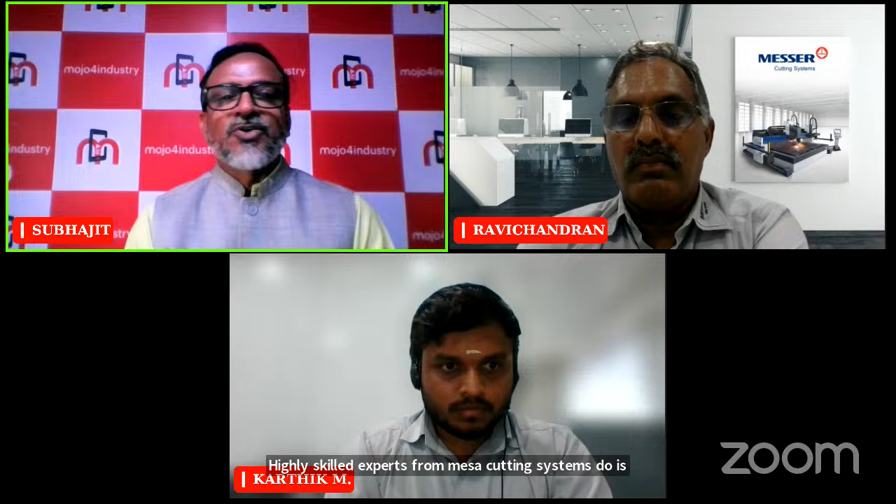Laser cutting, powered by smart manufacturing techniques. We will cover how laser cutting integrates with smart technologies to increase efficiency, precision, and flexibility. Highly skilled experts from Messer Cutting Systems India, Mr. Duraiswamy Ravichandran, DGM Product Management, and Mr. Karthik M, Manager Product Management, will share their insights into how integrating laser cutting with smart manufacturing techniques enhances precision, boosts productivity, and ensures high quality outputs.

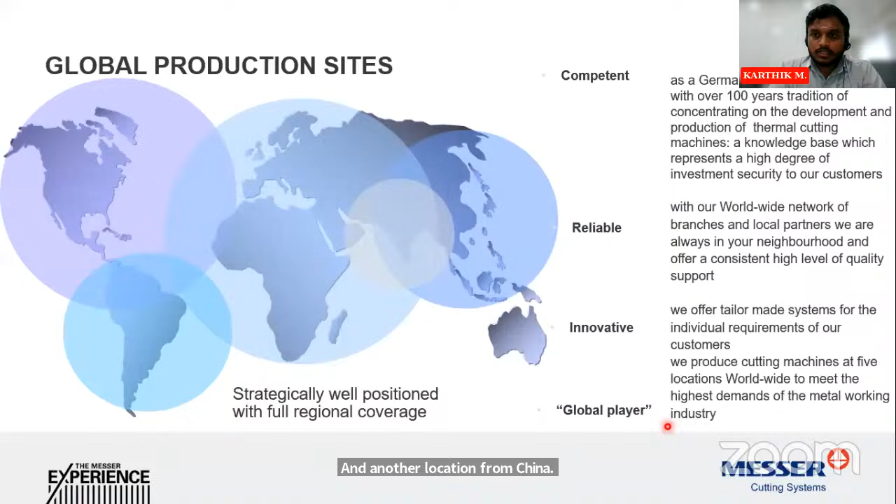We're a global player in every particular cutting industry. These are globally spread, with a plant in North America in Wisconsin, the second in Brazil, Europe from Germany, and India, with the territories of India including parts of Middle East taken care by the Indian territory, and another location from China. For all the eastern parts of the globe, it is taken care from China. Those are our global presence.

To start with, everybody knows that we are into thermal cutting equipments, and basically the thermal cutting process is split into 3 segments: oxy-fuel, plasma, and laser. The oxy-fuel is the very old and traditional method of cutting, where the thickness or capacity of cutting is much higher compared with plasma and laser.

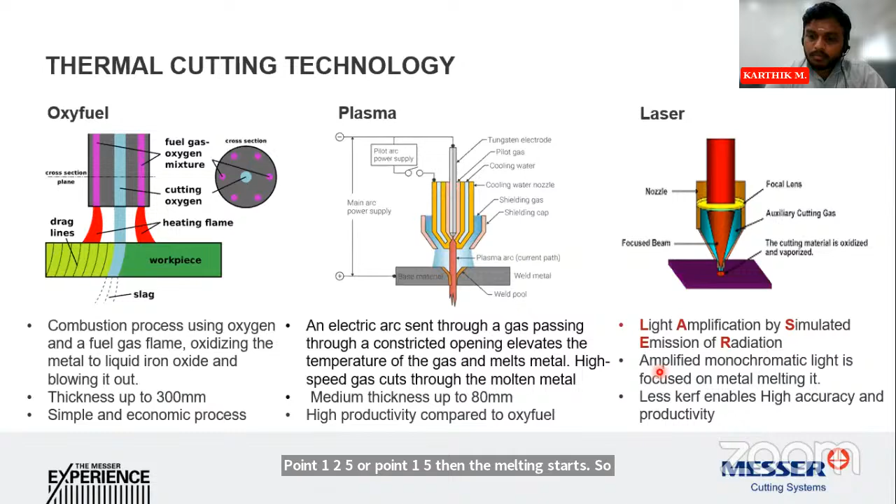Laser is again a typical process, similar to oxy-fuel, where in oxy-fuel the fuel gas itself is the source, whereas here the fuel is sourced from light. So when we focus a beam or ray of light towards a particular point at an intensity of a very fine spot, say 0.125 mm or 0.15 mm, then the melting starts. Once melting starts, it is again a fusion process where oxygen or nitrogen is blown to carry away the molten metal. That is how this process is basically explained.

Here is the capacity comparison of when to choose oxy-fuel, when to choose plasma, and when to choose laser. When you have a higher capacity, go for oxy-fuel; for medium capacity, go for plasma. With laser, at least now we are limited to certain thickness, that is 30 to 40mm, because the products widely found in laser are up to 20 kilowatt, at least until now. Of course there are much higher powers available in market, but since we are speaking about a very prominent or stabilized product available as of date, it is 20 kilowatt up to. That is why we have mentioned thickness of 30 to 40 mm.

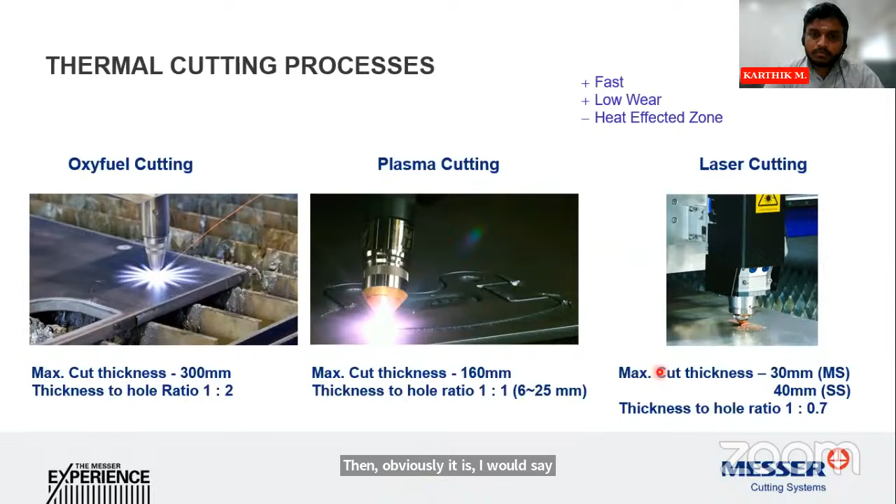When you see the capacity for oxy-fuel, when you want intricate cuts, the thickness to hole ratio is 1:2, whereas in plasma it is 1:1 -- that's the maximum possible in plasma. When you come to laser, it is much lesser. That is one of the very intricate things you find in laser -- you can go for intricate cutting, you can go for accuracy. So when you want to combine accuracy with a clean cut, or a nice finish, it is like two different techniques of plasma and oxy-fuel combined into one. Two different advantages combined into a single process, that is laser.

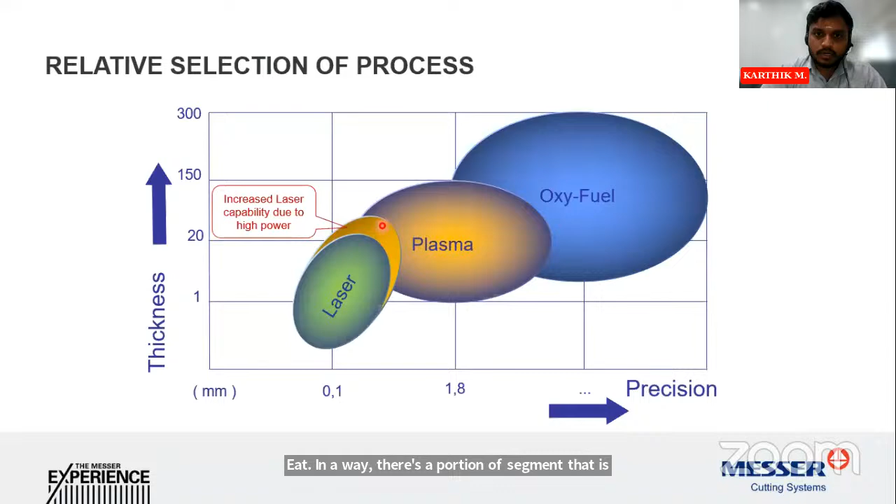So going on, this was the original map we prepared to plot when you choose what process. It is like thickness to precision -- that's what this chart means. The x-axis is precision and the y-axis is thickness. This was our chart traditionally, but due to the increase in the laser market or laser products globally, the developments we are seeing in laser are so rapid and fast that the capacity is being eaten away. There is a portion of segment eaten away from plasma. So we see a rapid change or growth happening from plasma to laser.

These are the advantages. The first thing is precision and accuracy -- definitely for intricate cuts with tight tolerances, laser is going to play a major role. When you compare material versatility, while comparing mild steel between plasma and laser, it is more or less the same. But when you go for non-ferrous metals such as aluminum, stainless steel, or brass, the rate of material loss, the accuracy, or the savings you get from laser cutting versus plasma cutting -- laser has much more advantage over plasma. You can save a lot of material as well, and the cut is very clean and neat. That is one of the big advantages of laser over plasma.

And of course, the surface finish, as I mentioned. The important factor we come to here is the heat affected zone. So what do we mean by that?

The heat affected zone is the area along the path of cutting, and when comparing plasma versus laser, the heat affected zone is much less with laser. That is one reason why, for post processing of a cut hole or slot, laser gives a much easier process than plasma, because the heat affected zone is much higher in plasma.

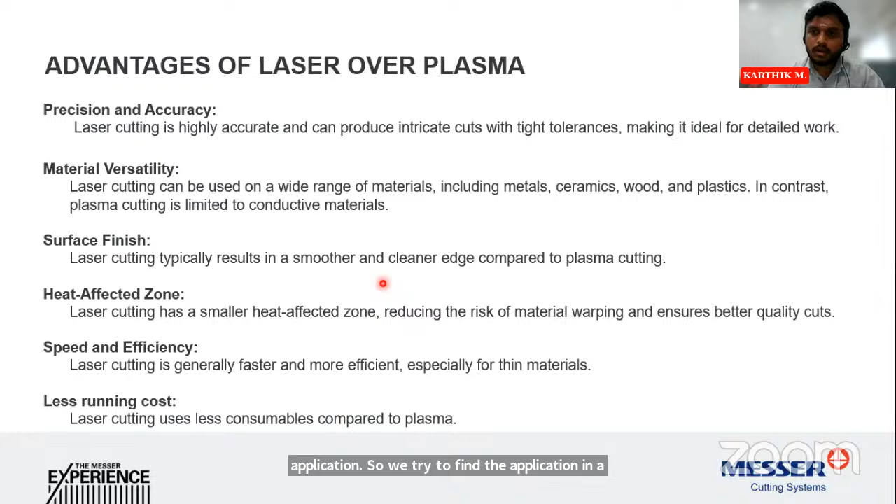And of course, running cost plays a major role when choosing the process. With laser, the running cost is much lesser compared to plasma. As I said in the beginning, each process has both advantages and disadvantages, so we choose based on the end application. We try to understand the application properly and then suggest our customers whether to opt for a plasma system, an oxyfuel system, or a laser system.

Of course, we also have cutting with air. The advantage of high power laser is that it makes the air cutting process much more affordable, because high power laser leverages the air cutting efficiency, making the running cost even lesser than the traditional process.

Moving on to the products of Messer, the first is the Fiberlight. This model has three different variants: a very simple table in 3015 and 4020 sizes, a table with a shuttle at the rear side with a parallel exchange mechanism, and a shuttle table with enclosure. All these are available in 3015 and 4020 sizes.

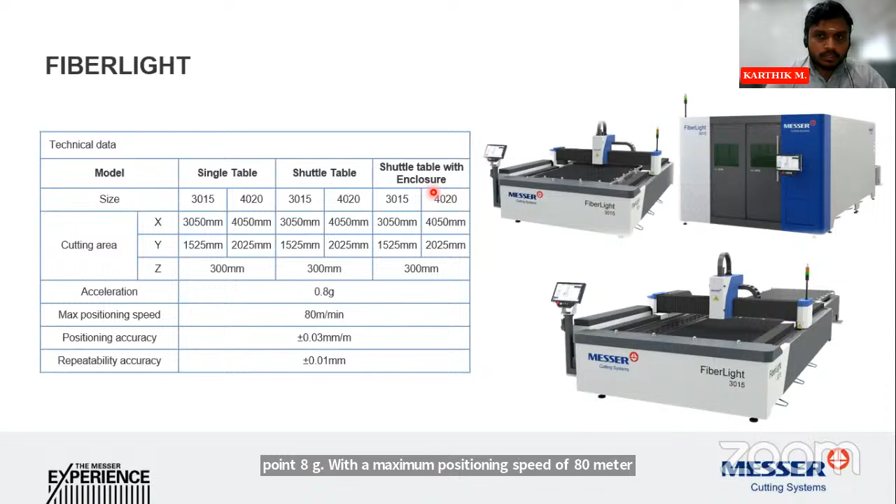The acceleration is up to 0.8 G with a maximum positioning speed of 80 meters per minute. This is for an entry level machine. And this is our 5th generation machine.

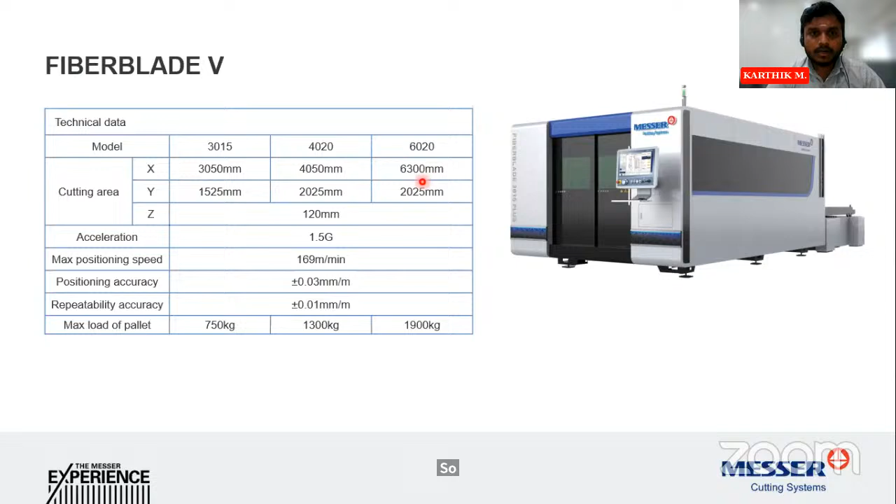This is available in three different sizes: 3015, 4020, and 6020 — here 60 means 6.3 meters, matching the maximum plate length of Indian sheets. This product has 1.5 G acceleration and a maximum rapid speed of 170 meters per minute, so it's a higher speed machine.

The three products you've already seen are standard format machines, which many of you would have experienced. But this one on screen is the Element 400, available for specific and exclusive cutting. You can increase the width and length to customer requirements — even a single plate of 12 or 13 meters length can be cut with this laser, since length and width are not a constraint for this model. We have a wide variety of standard track gauges, with rail to rail distance and effective cutting widths mentioned below.

This machine has a lesser acceleration, but it has dynamic movement with more precision and stable cutting performance. The maximum positioning speed is up to 50 meters per minute, with optional variants available up to 100 meters per minute. The acceleration ranges from 0.04 G to 0.2 G, and it can be varied — all these variants and options are given based on the customer's end application.

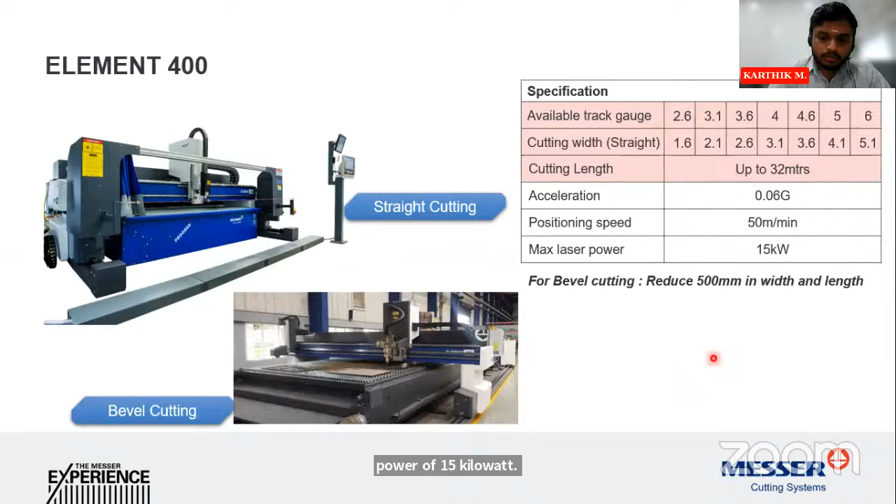This particular product can go up to a maximum power of 15 kilowatts. The length can be adjusted up to 32 meters depending on the customer's need.

Here you see the basic details about the bevel system. Bevel systems are basically used for preparing the edges, or weld preparation. Any welding needs a weld preparation method. Many do it manually, with angled cutting or a handheld portable system for beveling solutions.

With laser, why bevel? First, you reduce much of your setup time. You save much time in weld preparation, the initial setup time, because without a bevel process we cannot go for welding. If we have to do a beveling process, first we cut a straight edge, then take it to another machine or manual cutting area to prepare the edges, then move it to the welding station. So one complete cutting process is eliminated, and two sets of setup time are eliminated. You can imagine the kind of time you save when a bevel system is attached to the machine.

The bevel angle can be varied from 2 degrees to 50 degrees - 15, 30, 45, 32, 48 degrees, up to 50 degrees, any kind of angle can be set.

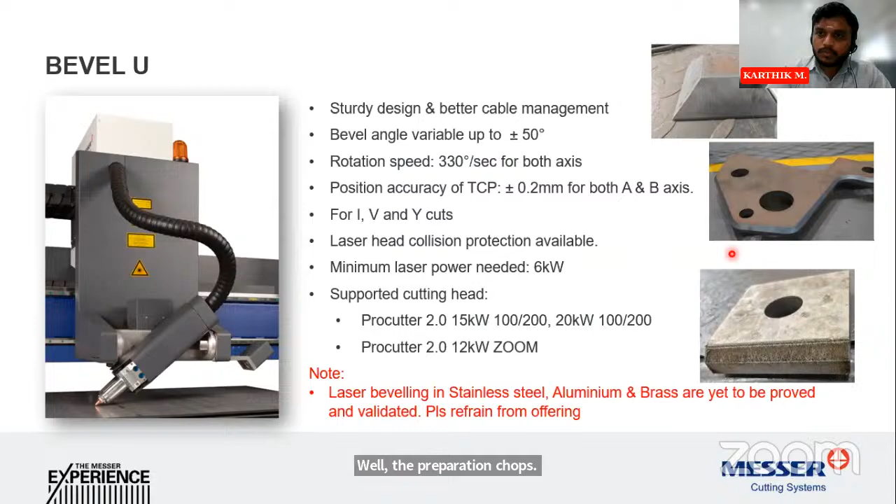This particular product was also given with a customized color. Usually our color, as you see, is blue, but this particular customer wanted a yellow color per their specific request, so we did that.

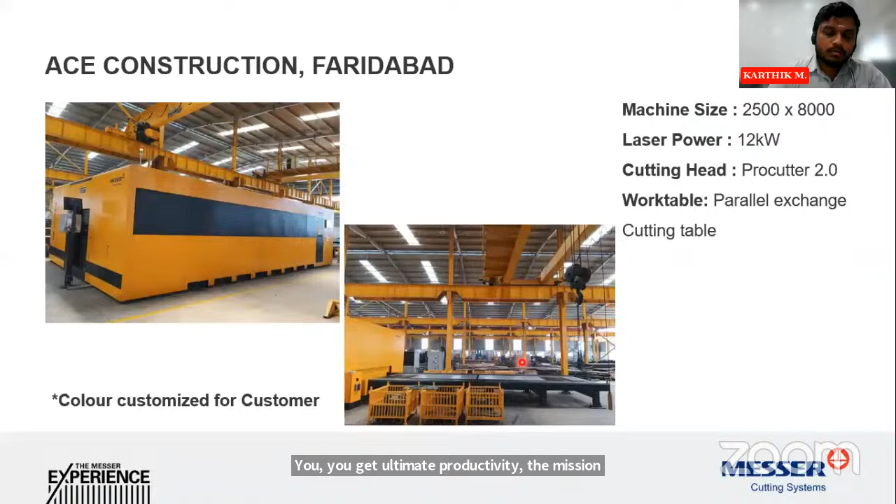This mechanism is not a normal one - the machine is gantry type but the work table is an exchange type. This model is available with an exchange table as well, with the fume exhaust on the front side of the machine, and the rear side has the table for loading and unloading. This gives much advantage for machine uptime. We choose this exchange table because you get ultimate productivity - the machine uptime is much higher compared to a stationary working table.

So I think I'm done, and automation will be carried out by Mr. Ravichandran.

So why do we need automation? Now automation has become not a luxury but a necessity in our daily life. Whatever field you take, there should be automation. That's the order of the day.

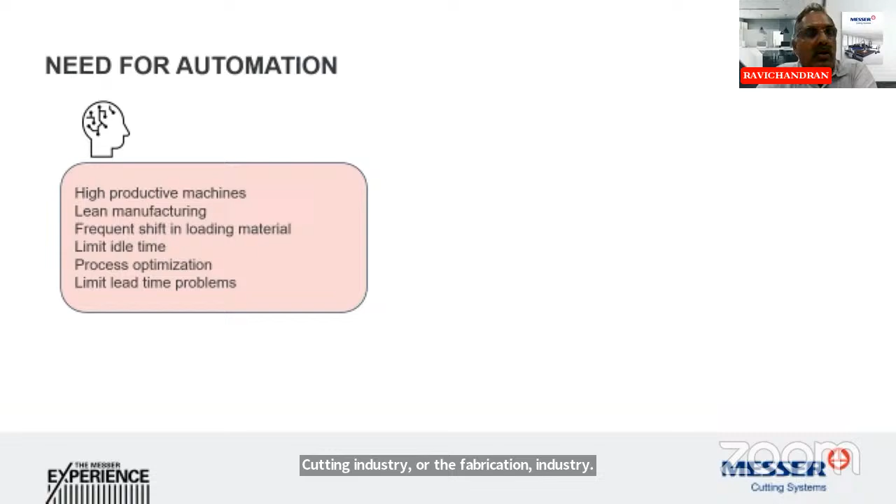In cutting industry or fabrication industry, why do we need automation? Because right now the machines being produced are highly productive. So if you don't have automation, there will be a case where you are underutilizing the machine. Machine will be waiting for material, waiting for one process after the other, waiting for material to flow. So all those type of things.

So when you have a highly productive machine, it's imperative that the process associated with it should also be highly productive. For that, you need automation and lean manufacturing. Lean manufacturing's trend is to reduce the manpower and reduce the process also. So the minimum number of people and minimum process you can use to affect a process or to manufacture is the order of the day.

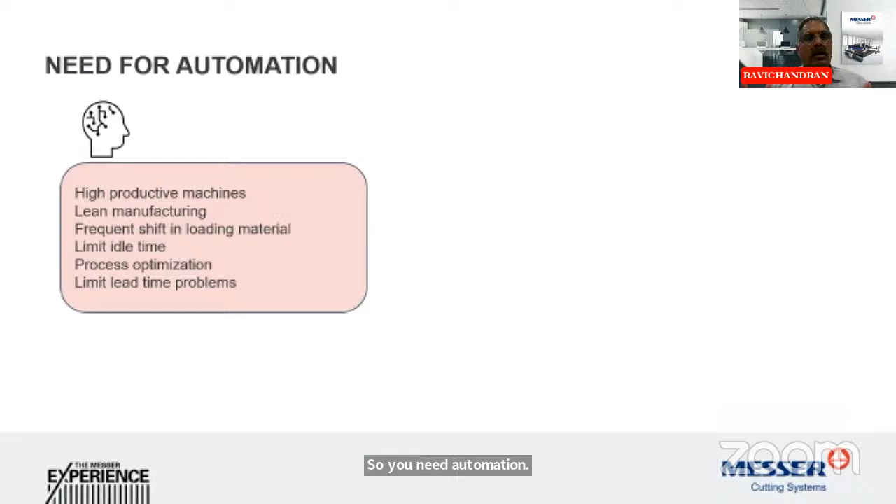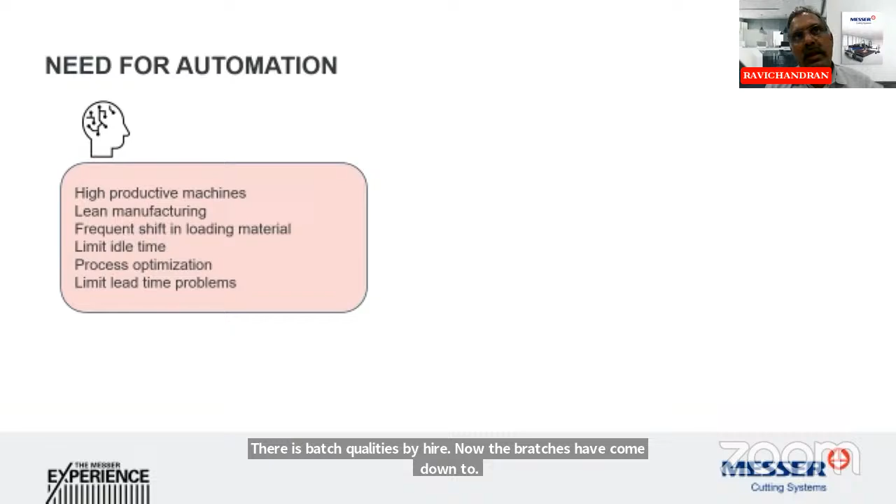So you need automation. Earlier days we had higher batch quantities. Now the batch quantities have come down to a limited value because we don't want to create inventory, or unnecessarily load unwanted material onto the machine. So you process only what is needed, like if you have a minimum order quantity, you process only for that quantity. So there'll be a frequent shift in the loading of materials, and you want to limit your idle time, and the process has to be automated or digitized so that across the organization people can view and analyze it, and so the lead time problems can also be solved. So all these things really need automation.

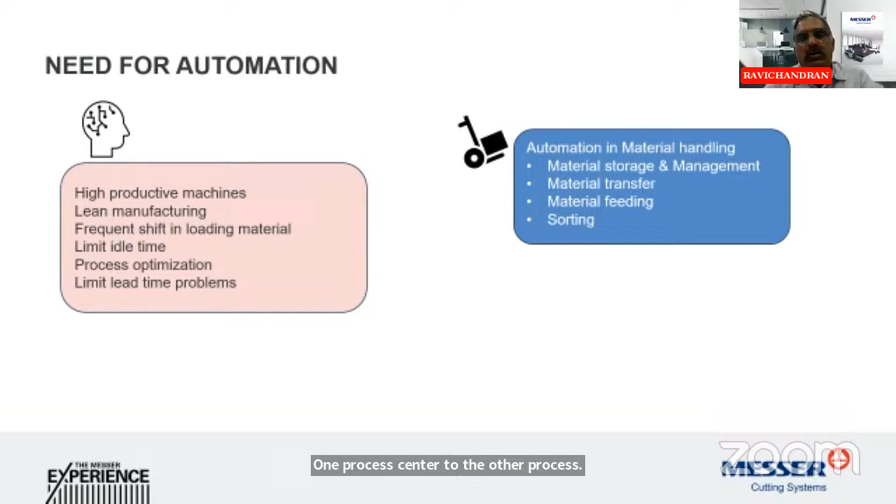Automation is not just automating it, it is digitizing it so that you can analyze it also. So majorly, the two areas where you want automation are material handling - how you take in the raw material, how you store it, how you shift it, how you feed it onto the machine, and after the process, how you move it from one process center to the other, sorting it, packing it, all those things. That's material handling.

The second is process digitization - optimizing the process flow, monitoring in real time so that what is planned is executed or not, or if there is any lag in actual execution, how do you use the data to analyze it so that in future you can avoid non-adherence to the planned time. So these are two things: one is material flow, and the second is process automation. On these two areas, we can make automation.

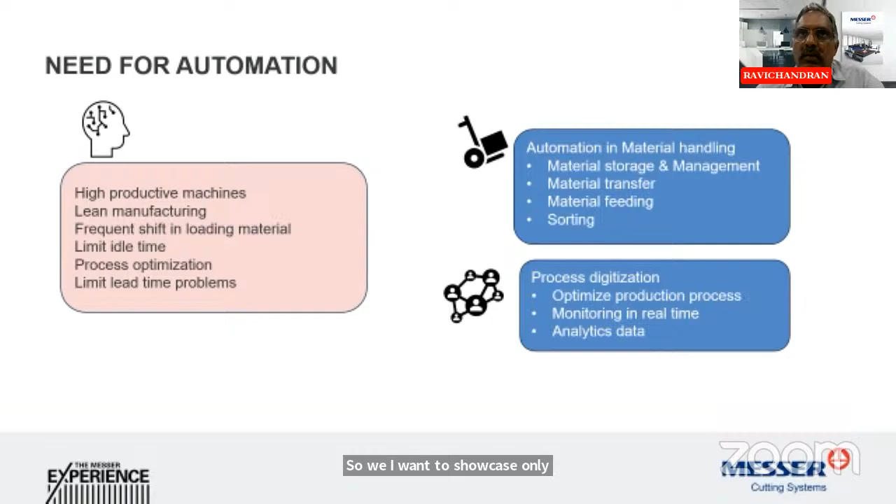First let us talk about material handling. At Messer, we actually work on plate cutting. So I want to showcase only the raw material, which comes in terms of plate. Before that, I will go to this slide at a later stage.

If you have an overview of the fabrication process, you have material inward, it is taken to storage - unless it's a small factory where it goes directly to the machine, you will have a storage place, then it is shifted to the manufacturing process. So it's something like a storage yard. Then from the storage yard...

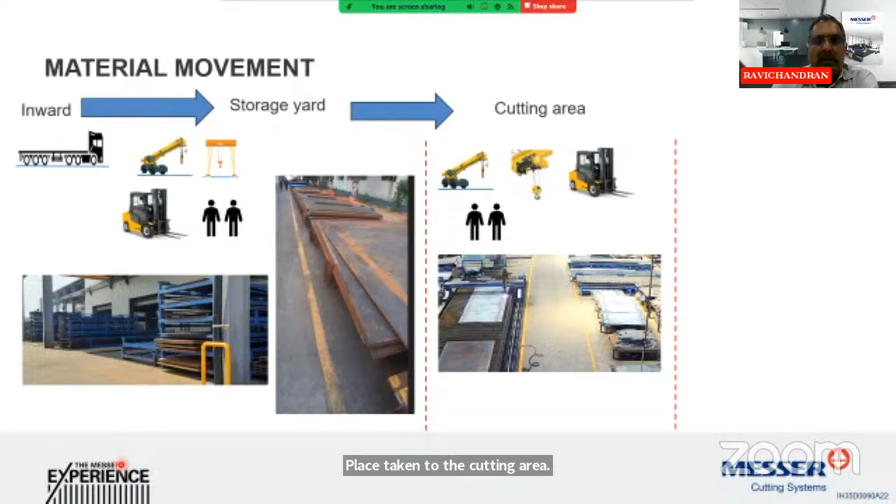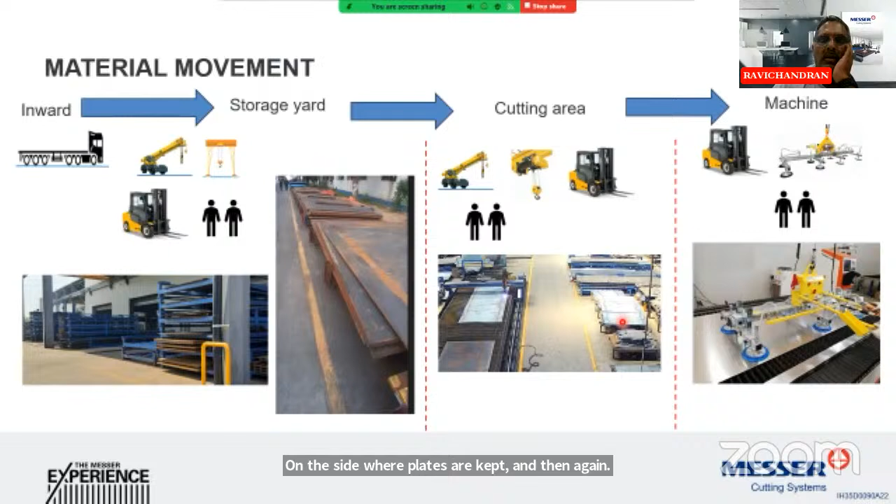Plates are taken to the cutting area. If you see here, this is the machine, a plasma cutting machine, and these are plates waiting to be cut, then plates are loaded onto the machine. Once the material comes, you have racks or pallets where the plates are kept, or skids on the side, and then again skids or racks near the machine where a small segment of the raw material is kept, which can be fed to the machine.

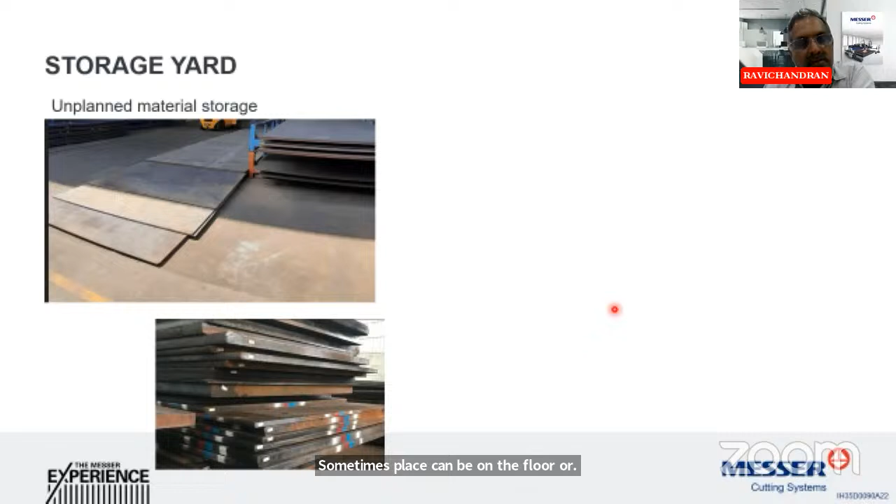So this is typical in all fabrication industry. But unfortunately, unless it is more organized, sometimes plates can be on the floor, or plates of different thickness can be stacked one above the other, making it difficult for material retrieval, because it's not just storing, the retrieval also has to be as smooth as ever.

So it's like you put a small plate at the bottom, then put another two plates which are not needed now, and then you have to take the third plate from below. You end up shuffling all the plates to take the plate from the bottom. That involves a lot of unwanted manpower usage. It's not value addition, it's like spending, a waste of process time. All these things should be avoided.

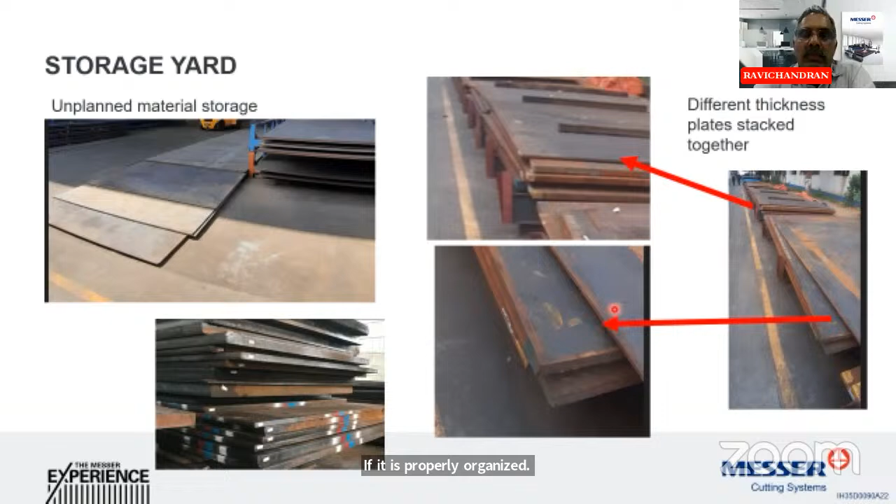If the storage yard is properly organized, and if the storage is done as per a plan, then all these things can be avoided. On the cutting area, you see haphazard storage, or somebody would have brought material, and before he could unload it to a pallet, the machine or forklift would have been called back for some other purpose. So even on the shop floor, on the gangway, you can find material. And the most important thing is

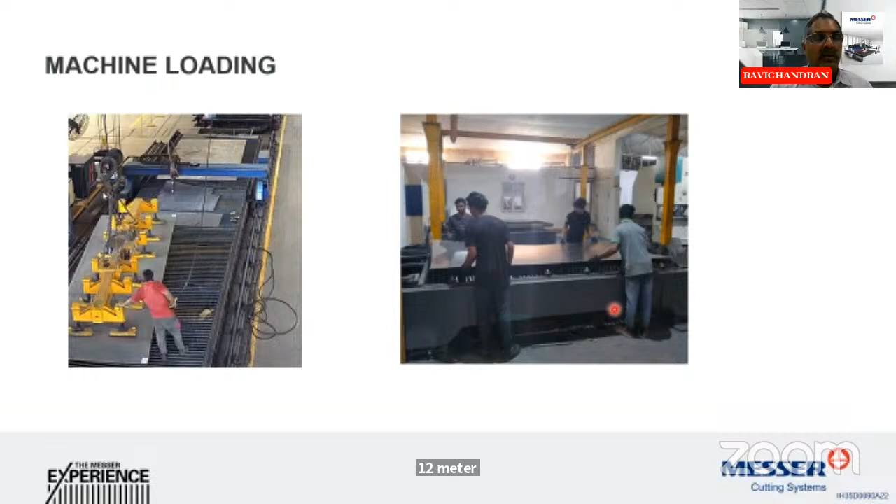safety. You can see on the left, a big plate being loaded onto the plasma machine. Maybe it's a 13-meter plate, 12-meter plate, or 8-meter plate by 2.5 or 3 meters. So if there's a small swing of the plate, then the safety of the operator is at stake.

And for a small plate, you can have manpower just loading it onto the machine. So even for a small plate, you need 3 to 4 people lifting the plate. So excess manpower is being used. These are all actually waste of manpower, and you are spending more on your process.

So the challenges. Normally in a fabrication unit, challenges arise if you don't have proper storage. Whatever we talk about automation is not just on the machine, it's also on the way you store your material, how you retrieve it, and how you update it into your ERP system. Everything should happen seamlessly so that you have inventory in real time.

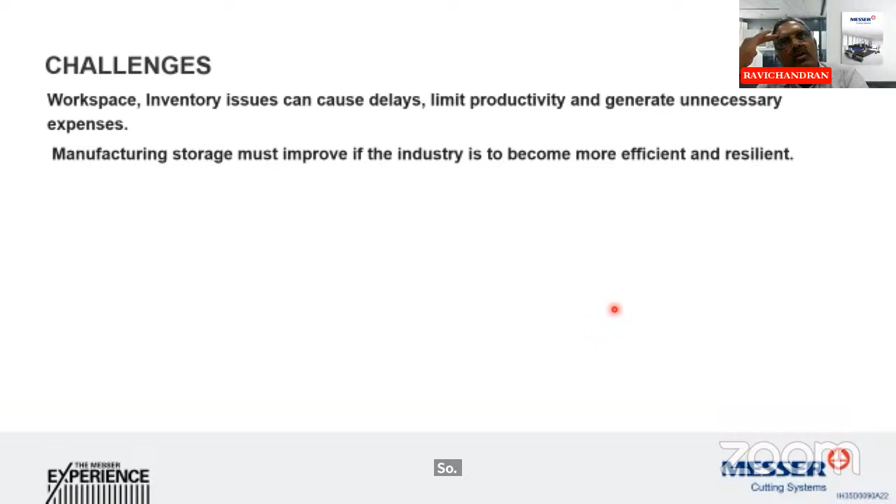Suppose it's not that way, then your process can be delayed. And if there is a delay in your process, then your productivity is reduced. All the unwanted work you do to retrieve material also adds to your expense. So as the business improves, your material storage and retrieval methods also should be more efficient.

And another challenge is if you are not digitizing, you don't have proper tracking, real-time tracking is not possible, and there's less visibility on inventory because some plates or raw material are hidden behind another raw material so they don't come into your view at all. So you keep purchasing extra material to top up and end up with unused inventory.

And then your space also is not well utilized. So there's mismanagement in all these areas - material and manpower management - and you will be depending on a lot of manpower, with a lot of workflow disruptions because of inventory issues and retrieval of raw material issues.

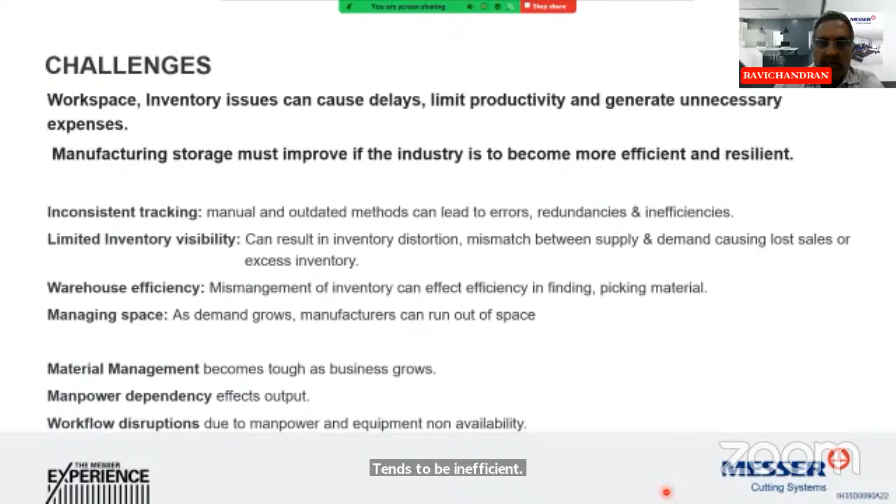When you have all those things, your workflow is disrupted, and indirectly your expenses mount, and your process tends to be inefficient, and your lead time also increases. These are the challenges which can be overcome using automation - your storage and retrieval system, your loading system, and your process automation or digitization.

So material handling, there are basic methods. Whatever I'm showing is one way of handling raw material. It's not the only way, and it can never be a single way like how machines are sold, because each customer will have his own layout, his own way of handling the machine. So all the automation is nearly, literally customized to the customer's requirement.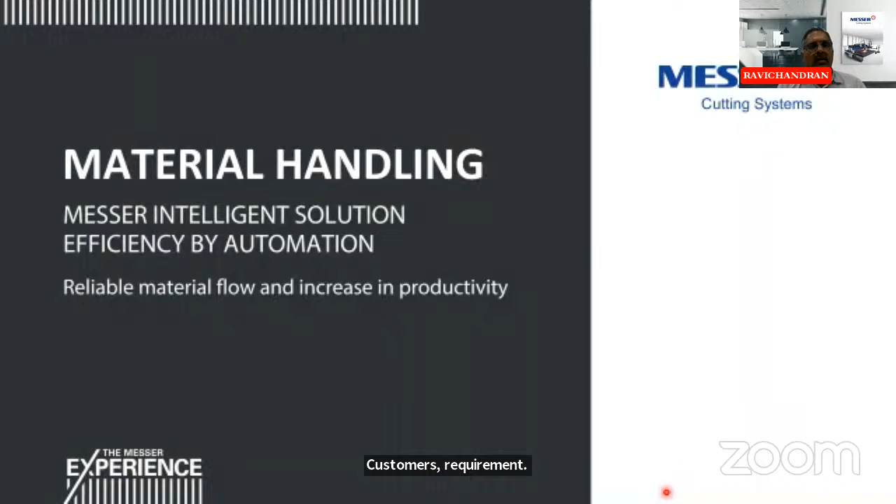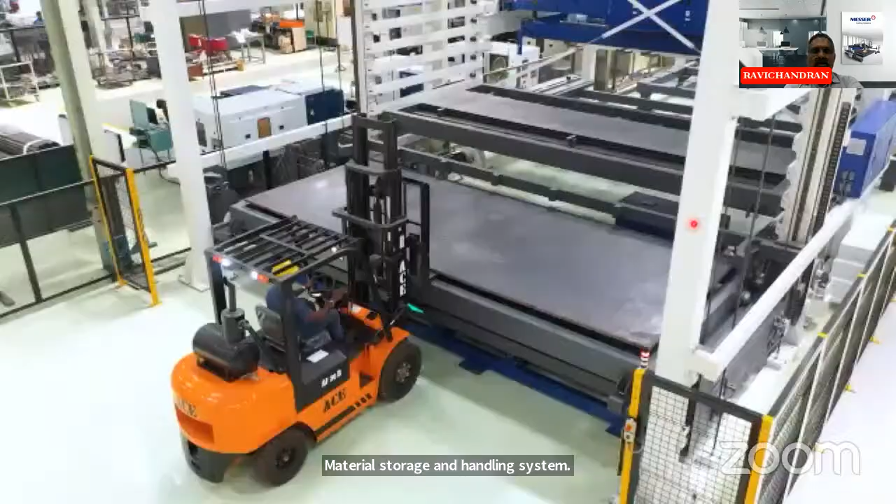So I'll just let a video flow. This is one of the material storage and handling systems which we have actually manufactured in India and dispatched to Europe. This is for handling a plate of 5 tons. What you are seeing now is a plate of 6.5 meters by 2.5 meters with a thickness of 40 mm - a plate of 5 tons being handled and stored.

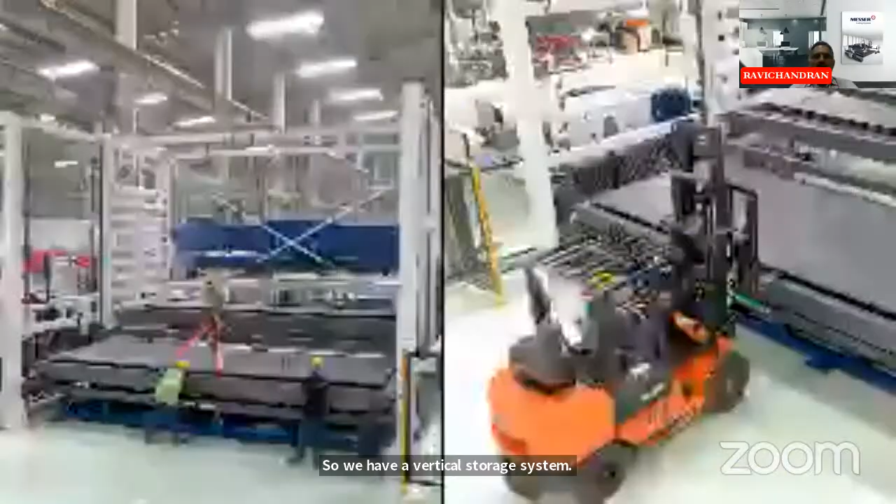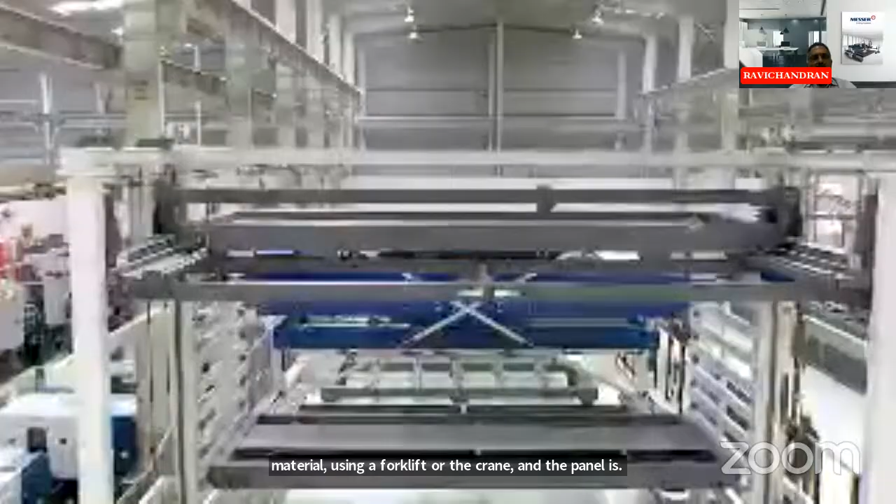So we have a vertical storage system. This is just an overview, not yet connected with any machine - this is before the machine is put in place. You can load the raw material using a forklift or crane, and the pallet is stored on this tower. You can have 10 pallets, 15 pallets, depending upon the vertical space available in the shop floor.

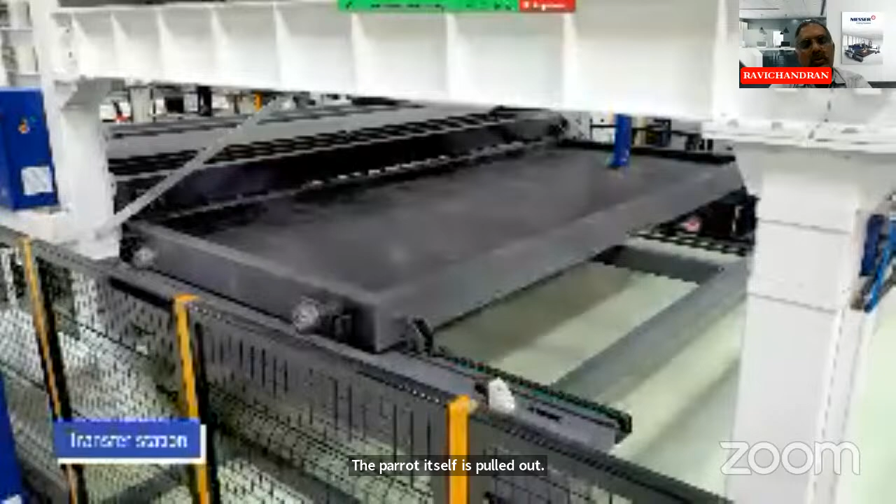Then when this plate has to be loaded onto the machine, the required pallet itself is pulled out and moved to the other side of the tower system, from where the plate is picked out and loaded onto the machine.

And this is just a simulation. We have not put an actual machine in place, so we just have a platform to represent the machine. So imagine after the plate is loaded onto the machine, it's cut.

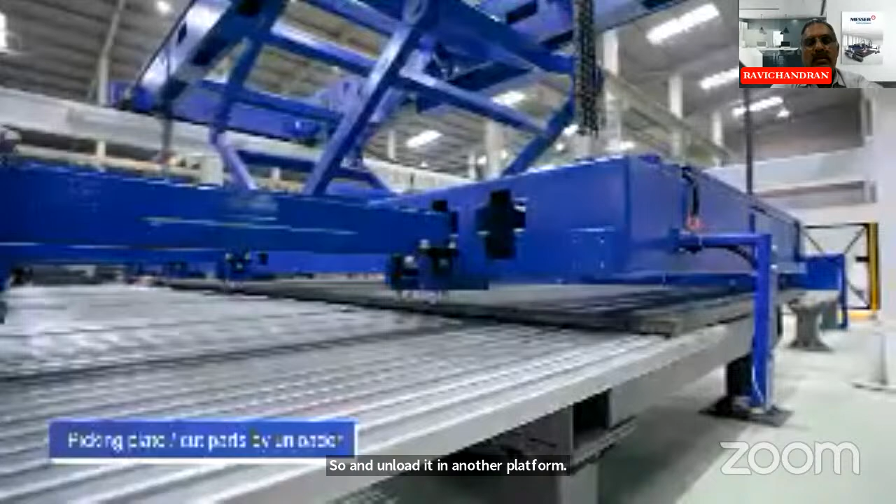The comb fingers come and pick the plate and unload it on another platform. I'm showcasing this because this is a heavy load, like a 5-ton plate, and that can be effortlessly handled, loaded onto the machine, and the parts cut in those plates can be unloaded effortlessly.

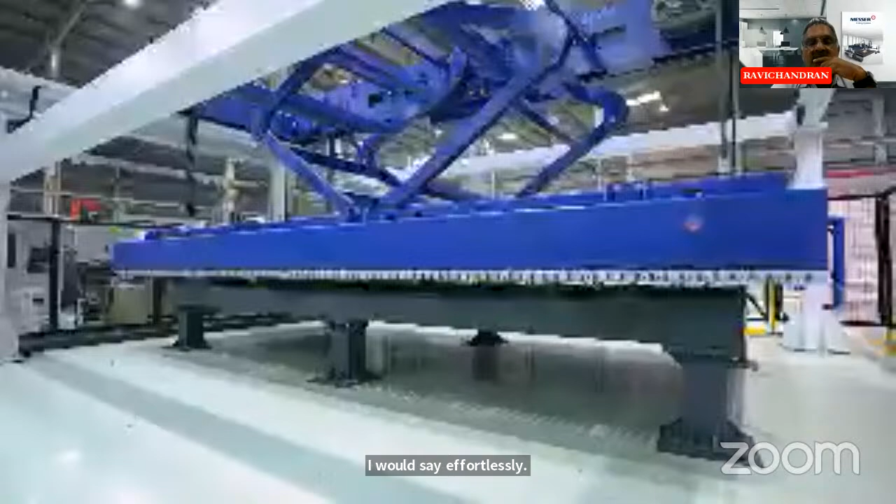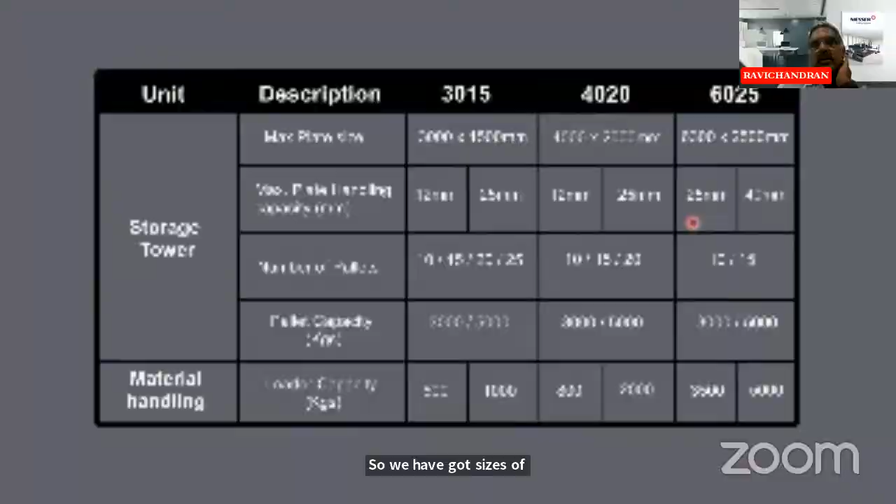So we have got sizes of 3 meters by 1.5 meters, 4 meters by 2 meters, and 6 meters by 2.5 meters. And now we have added a size of 7 meters by 3 meters.

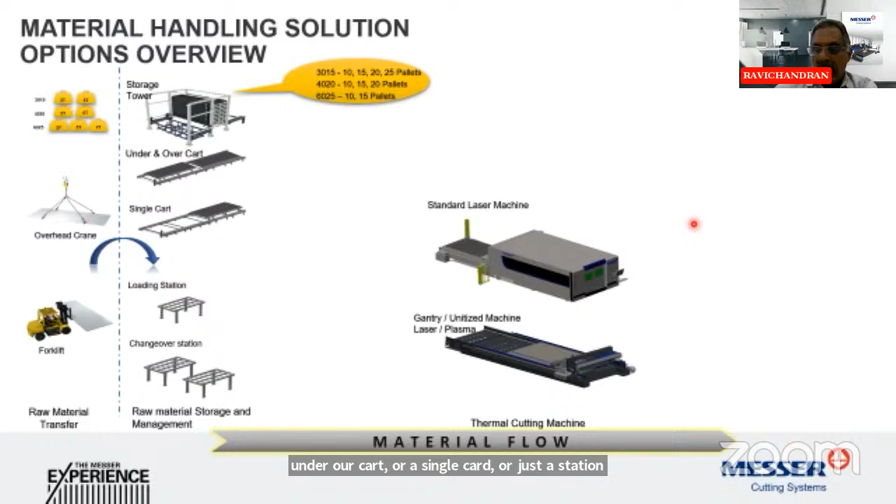Generally, we load the plate directly onto the machine by a forklift or an overhead crane. Now, using an intermediate storage system, the effort is being reduced. You can have a tower where we store all the material, or an under-and-over cart, or a single cart, or just a station where you put a bundle of plates. And the vacuum loader picks up the plate and loads it onto the machine.

After it's being cut, the comb unloader picks the cut parts and unloads it onto a single cart or unloading station. Or, if you want cost effectiveness, or if the cutting time is more, we can combine the lifter and the unloader as a single unit, which can be a combi lifter.

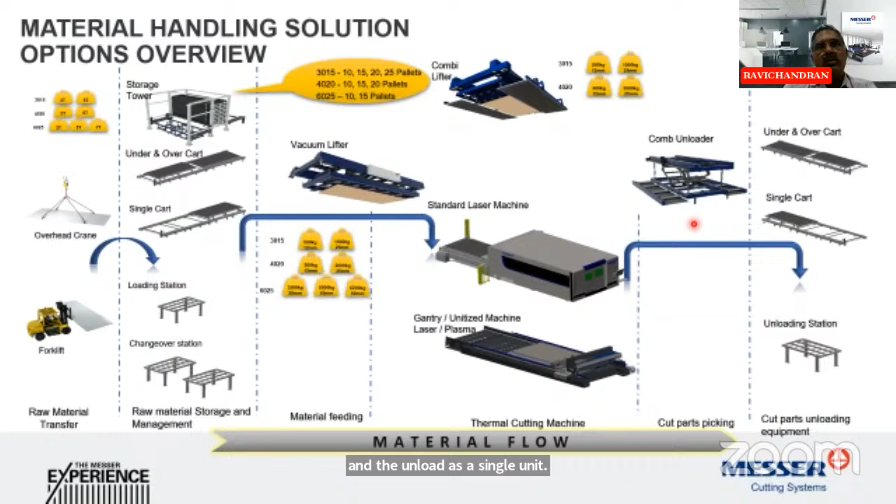So what you saw in the video was a separate vacuum lifter and comb unloader. We have a premium version where you have them separate, and a basic version where both the vacuum loader and the comb unloader are combined into one unit.

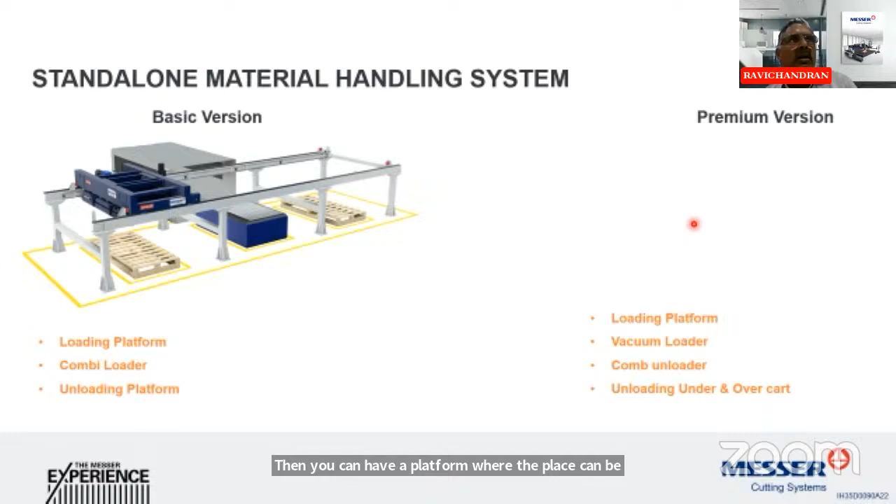So you can have a full-fledged system with a tower and the loader and unloader working, or if you're looking at cost, you can have a platform where the plates can be picked and loaded onto the machine, and from the machine the cut parts can be picked and unloaded onto another platform.

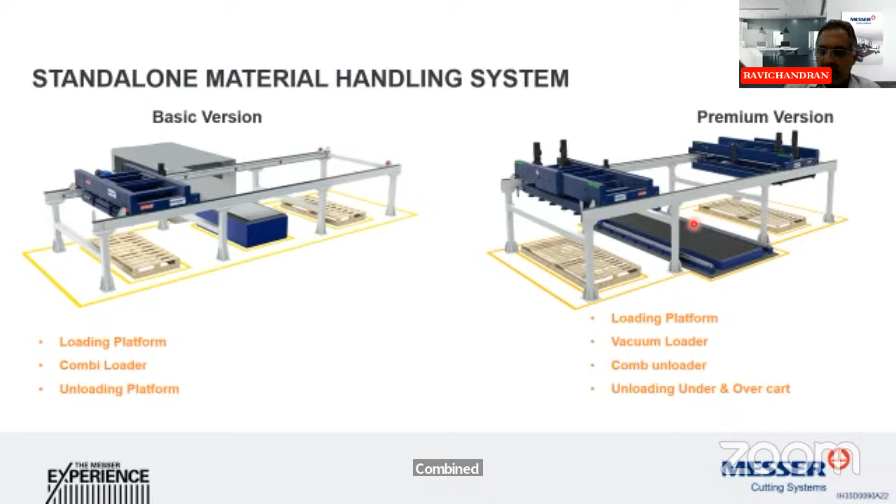And then a premium version, instead of a combined combi loader and unloader, we can have a separate loader and unloader with the same type of platform, and a cart moving in. So you have a bundle here, where the plates are picked and loaded onto the machine one by one, and in that time a new bundle can be put here. Once this bundle is over, the new bundle is pushed in, and the empty cart comes out.

So the machine works 24 hours by 7. This is for the loading side and this is for the unloading side. On the premium version, the same type of setup can be used.

This is like when you have a bigger plate, and one thing is this can be coupled with additional machines. You have one machine, two machines, or three machines. A maximum you can go up to 4 machines. The normal loader and unloader can be used.

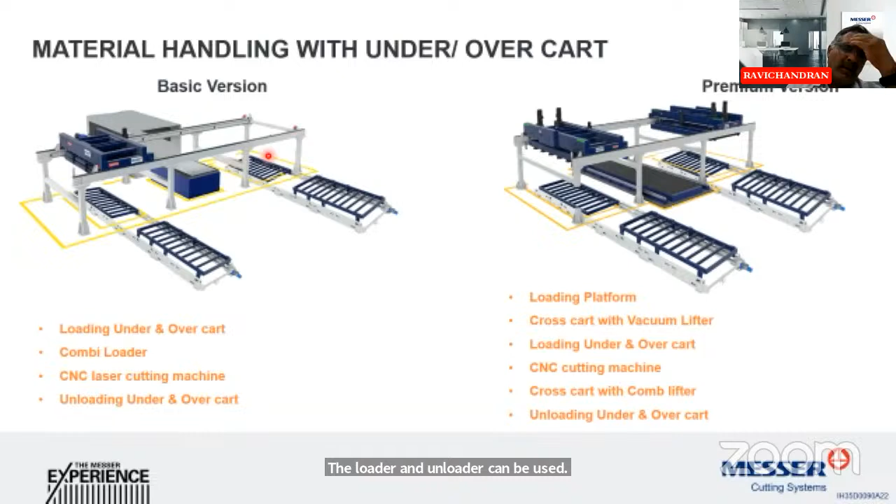Suppose if you are thinking of automating one single machine, then we have a solution called compact solution. It can be in line to the machine or perpendicular to the machine, where the plates are stacked on a platform, and the loader picks the plate and loads it onto the machine.

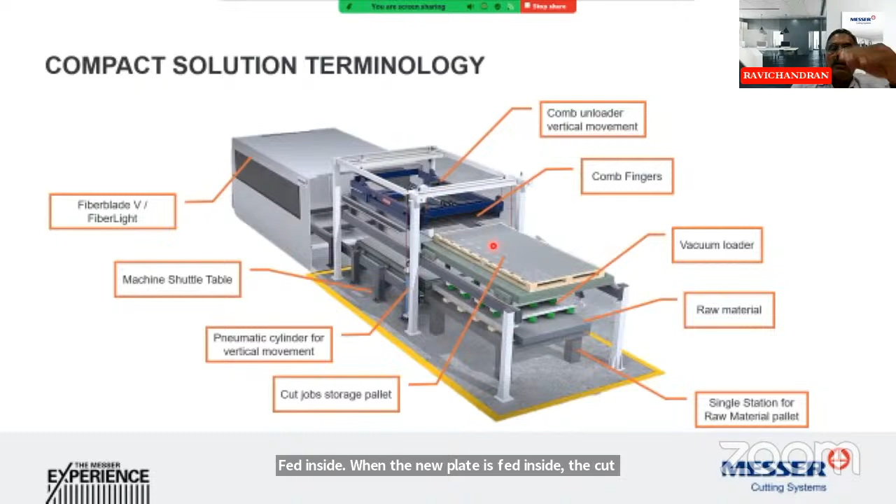After being cut, the unloader, which is stationary and only has a vertical movement, comes down, picks the cut parts, and then the new plate is fed inside. When the new plate is fed inside, the cut parts are put on the platform. So we have two orientations: one in line to the machine and one perpendicular to the machine.

I have a small video to showcase that, which is more self-explanatory.

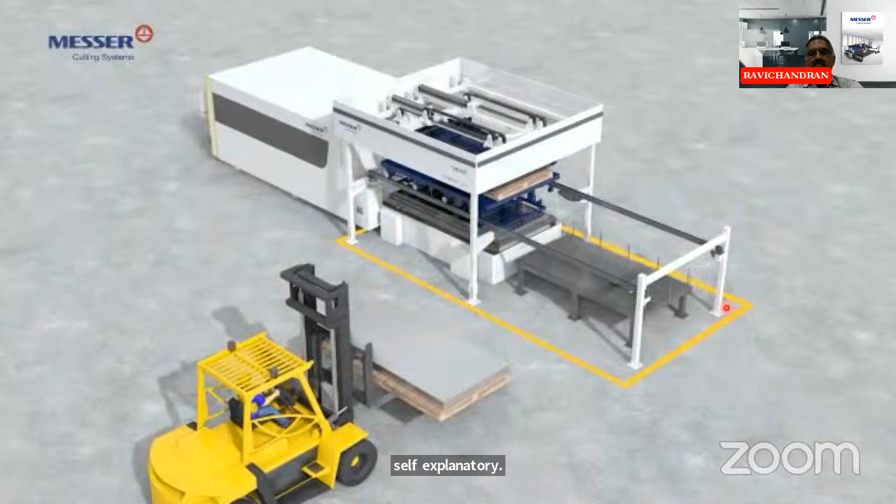Messer Cutting Systems India Private Limited presents the compact material handling solution for standard fiber laser machines. Compact automated material handling system ensures machines are fully utilized, contributing to a reduced cost per part and faster return on investment.

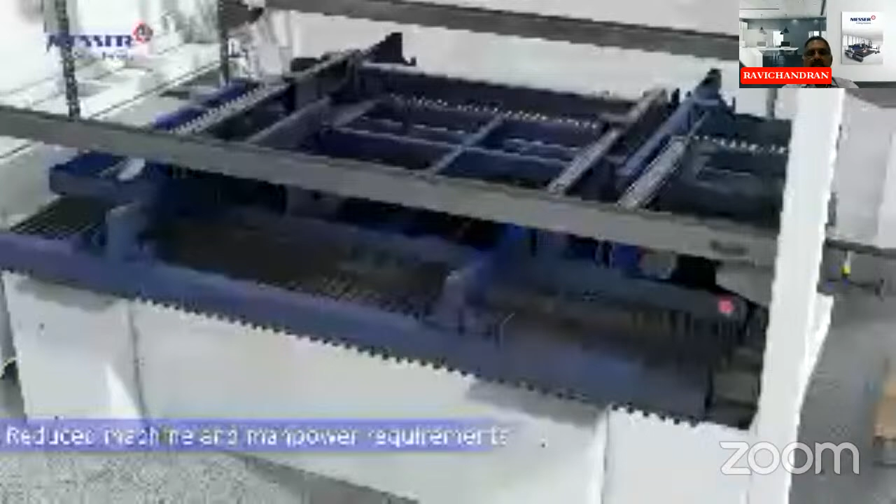Automation is an effective solution to reduce machine and manpower requirements. Messer Compact solution is reliable and stable to maximize productivity, reduces machine idle time between sheets, improves work environment and safety, improves workflow through the factory, eliminates manual loading and unloading, low maintenance.

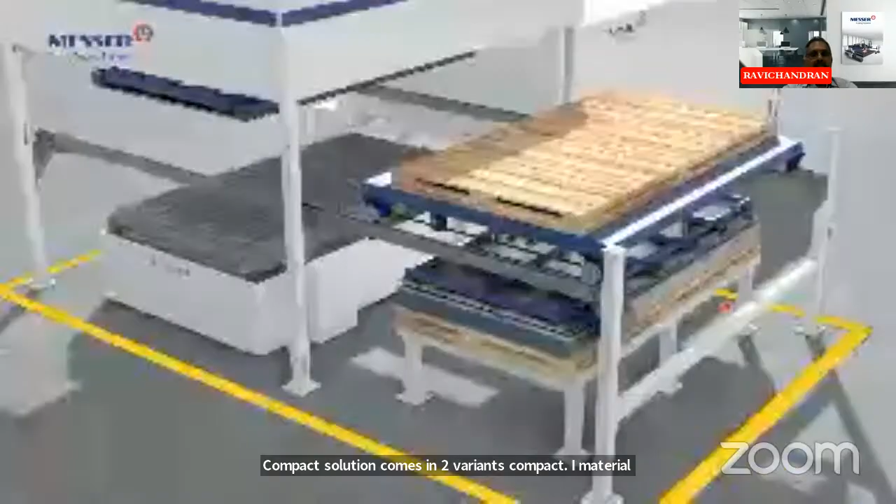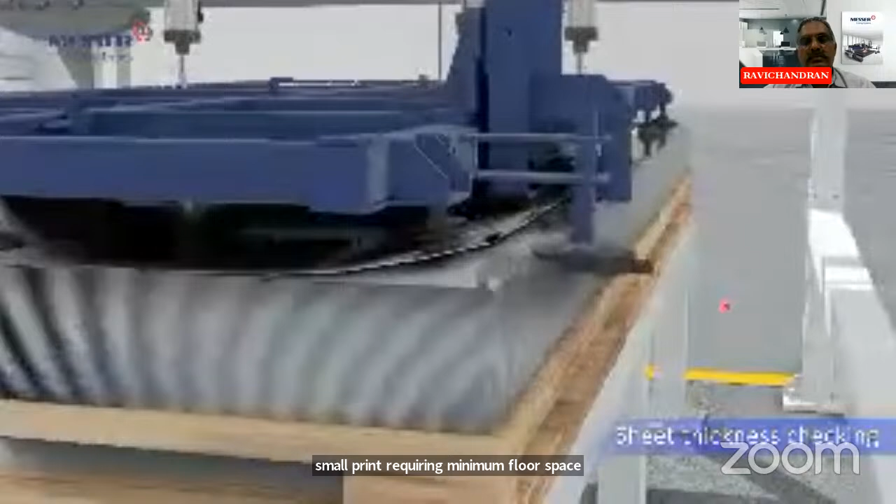Compact solution comes in two variants: Compact I, material feeding system inline to machine shuttle; Compact T, material feeding system perpendicular or parallel to shuttle. Compact I and Compact T solutions have small floor print, requiring minimum floor space. Sheet thickness checking for thinner sheets avoids multiple sheet loading.

Symmetrical design of Compact T enables material feeding from either side of the shuttle table.

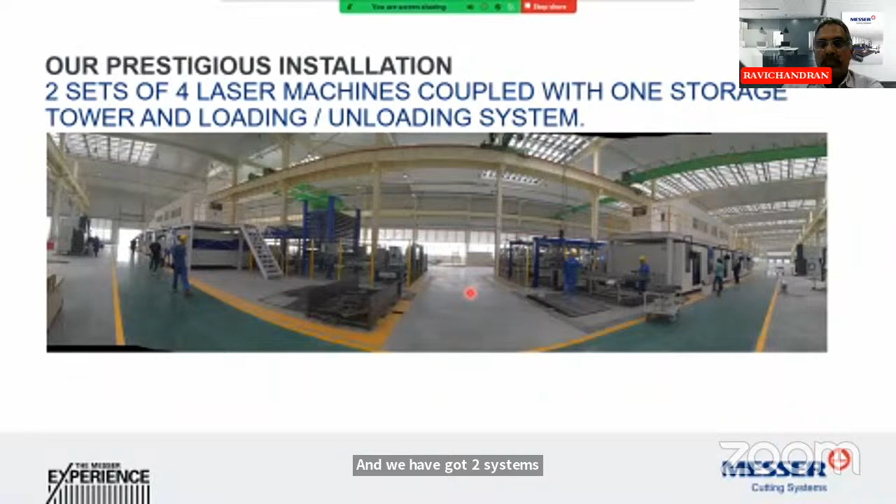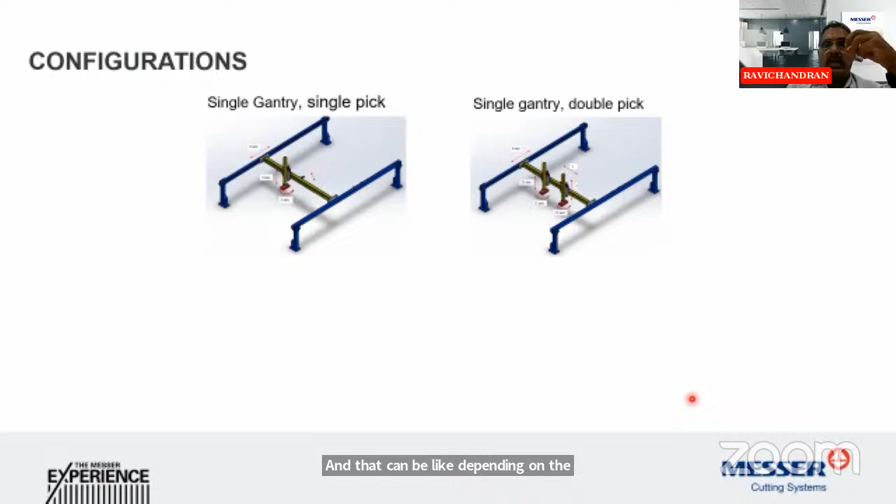And then we have the smart crane also, where we have picking arms, and that can vary depending on the size of the machine and the weight of the plate being used. It can be a single gantry or a double gantry, with a single pick or a double pick, and it can be a combination of double and single also.

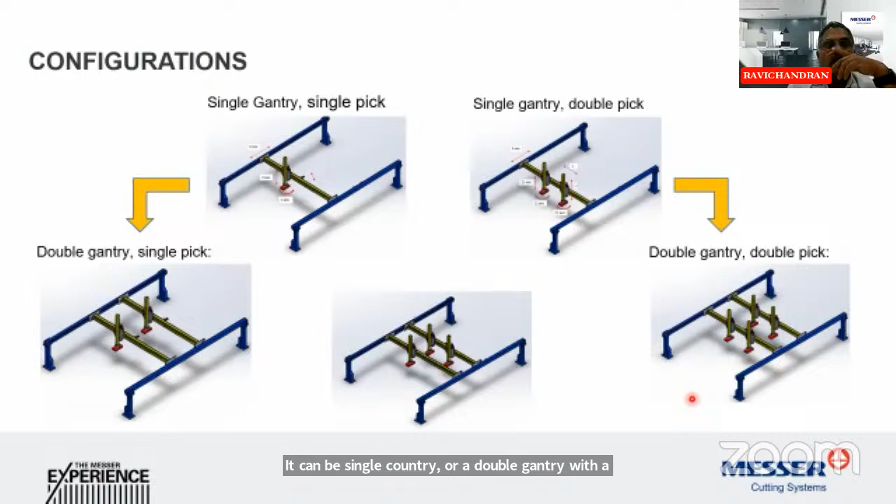So it's all highly customizable, and the end of the picker can be magnet or it can be vacuum pads. The typical example is you have a machine, the plate is loaded, once the cutting is done, the parts are picked up, sorted, and stored in pallets. So depending on the weight and size of the component, the picker also varies.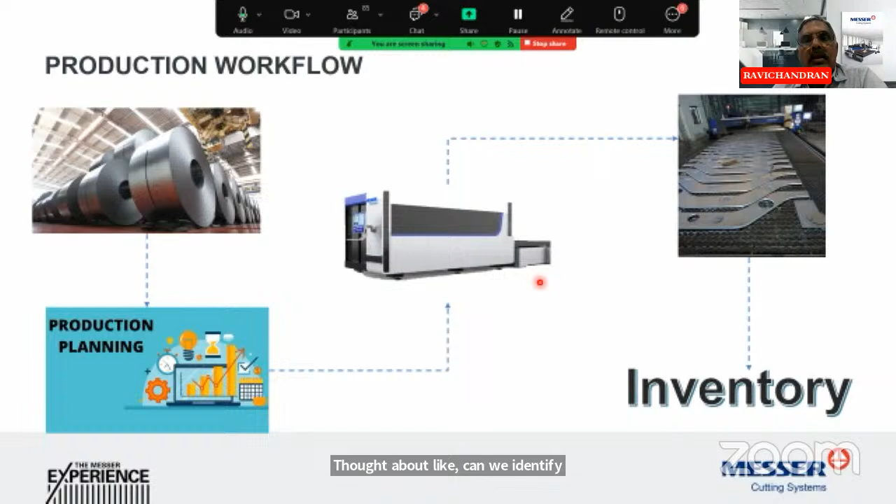For process digitization, the normal production flow is raw material to planning, then to the machine where the actual process happens, and then the parts go to inventory. This is the normal thing with a work card and manual tracking. But if this is automated and digitized, the work is much simpler, and bottlenecks can be identified much earlier, making the process more effective.

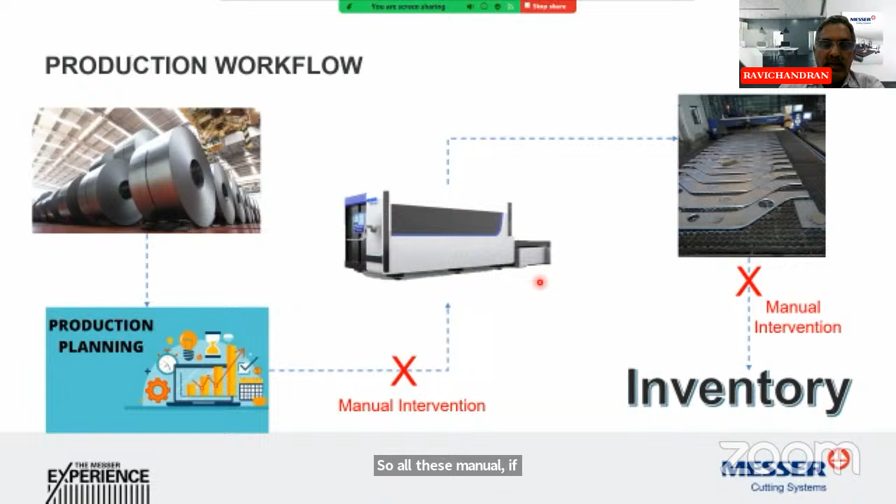So if you're eliminating the manual intervention, what we have is 4 modules, which we call OmniFab modules. We have the ERP Connect, which interfaces with the ERP system of the customer and takes in the demand for the plates.

We are talking only of plates, not rounds or pipes or structural steel or castings, so it's only about plate and plate cutting. It takes up the demand from the ERP system automatically, and that is split into various thicknesses and types of material, and the nesting is done using OmniWin.

And then the scheduler, if you have more machines, automatically schedules the jobs according to each machine's defined characteristics set by the customer. And then the process happens in the machine.

Once the cutting is done, the PDC, that's process data capture, feeds the information back to the job scheduler, so that it takes in how many parts are being cut. This is where the operator indicates, say he has cut a particular part of a plate from a plate.

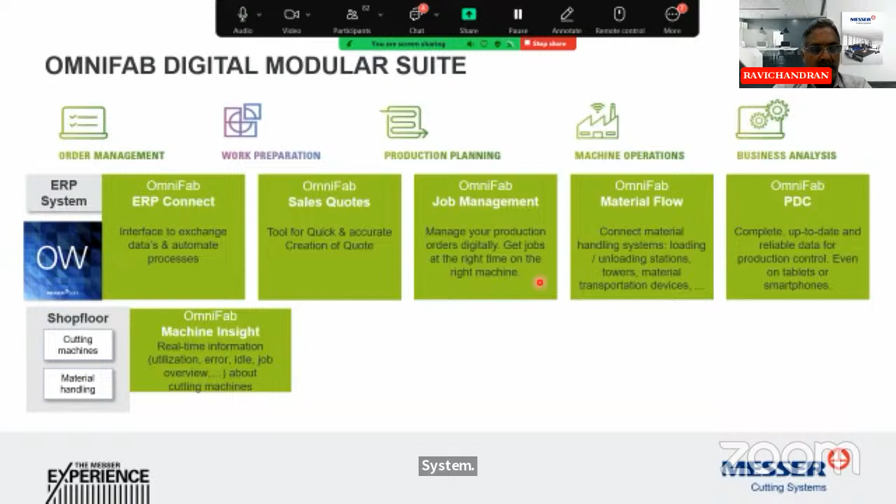Machine Insight gives real-time information on utilization, error details, idle time, and job overview. It's like automating the process so that it will show bottlenecks in advance and gives real-time feedback, which ensures high transparency in total effective parts and order control.

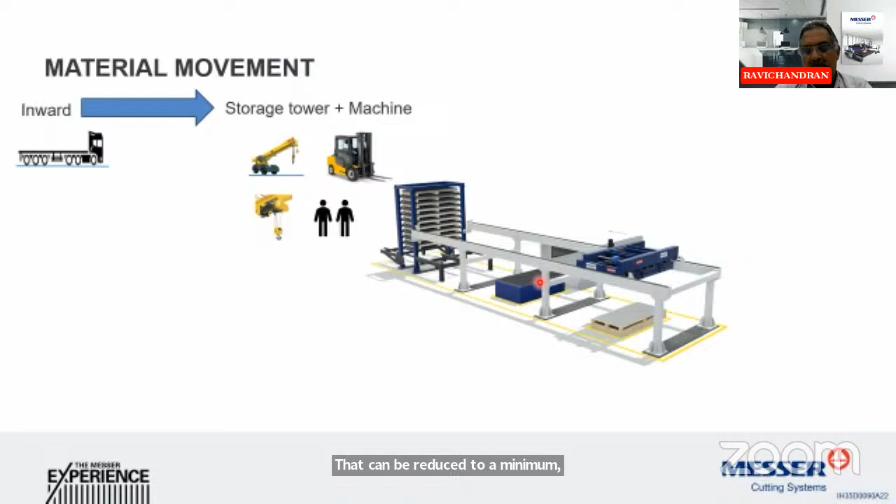So it's like whatever I shown earlier, the same type of manpower and the way it's being stored can be reduced to a minimum, with minimum equipment and minimum manpower being used. It's like when you use automation, you have predefined places for storing and retrieving.

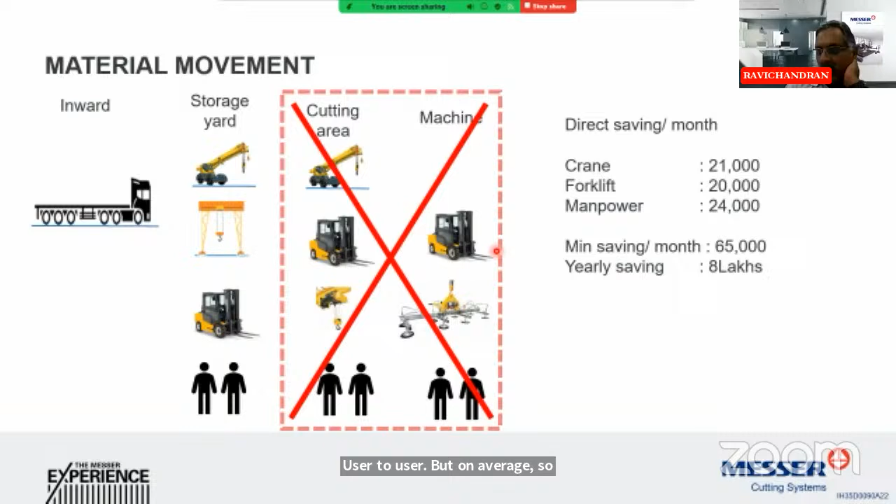So on a medium sector industry, your saving will be somewhere around 8 lakhs. This is what we have calculated. It varies from user to user, but on average, if you have an automation installed for really 1 crore or 1.5 crores, your direct saving will be somewhere around 8 to 10 lakhs per year.

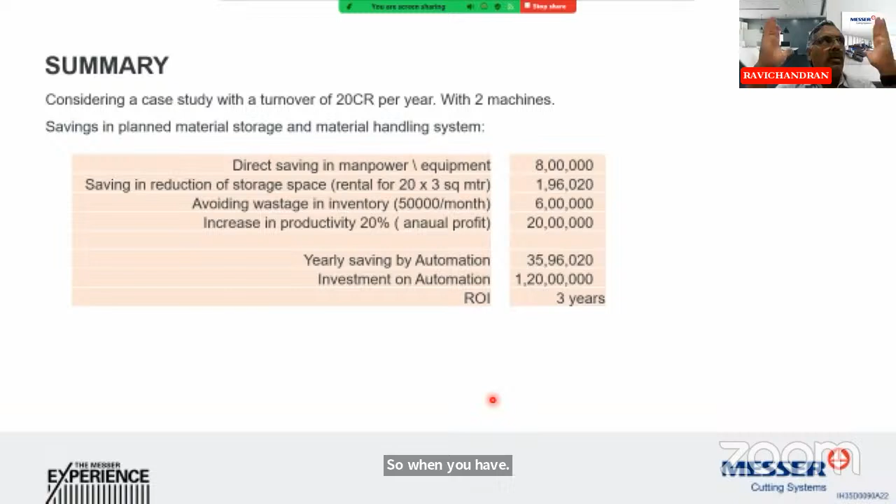I'm saying that, but it's not the case when you look into a bigger perspective. When you have a storage and retrieval system, you're reducing the space of storage, and you are planning the inventory well. So there will be a reduction in inventory, a reduced wastage also, and ultimately the productivity will increase by at least around 15 to 25%. I've taken an average of 20%.

So even doing a very conservative calculation, your return on investment will be a maximum of 3 years with any automation being installed. It's not a benchmark, it is just an indicative inference. So if you have an automation, your maximum return on investment will be 3 to 5 years.

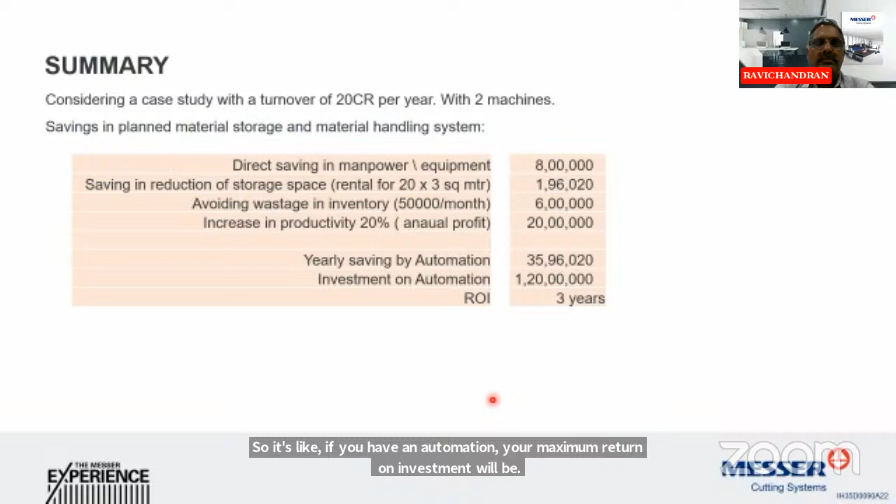Benefits of automation: increased productivity, lowered operating cost, and increased product quality. Then improved worker safety, because for performing unsafe work, the equipment will work. And since the equipment is going to do the repetitive or tedious jobs, your manpower can be used for more creative working, and this will definitely help plan our workflow better, ensuring better use of floor space. And with all this, decreased environmental footprint.

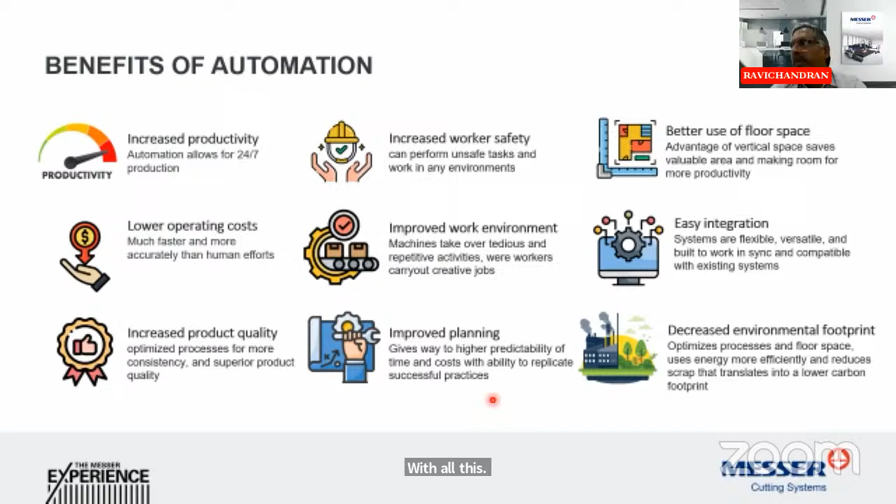Now coming to the end of the session, the current trends and innovations in the laser cutting industry are high power lasers. You'll be shocked to know that right now people are actually testing somewhere around 120 kilowatts and 150 kilowatts, so that you can cut more than 250 thick material.

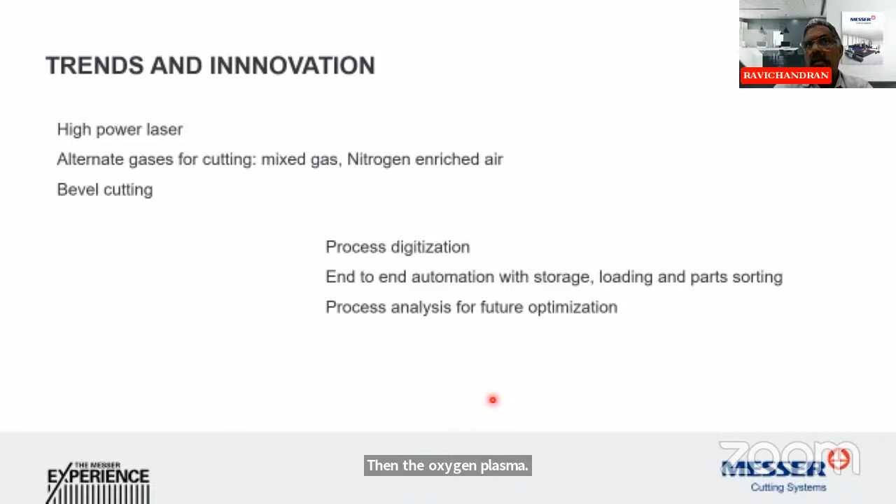People are looking at using laser, which is more environmental friendly than oxyfuel and plasma. Right now, nearly 60 to 70% of the plasma market has been eaten up by laser, and efforts are being made to even utilize the oxyfuel capability. Earlier it was only oxygen, nitrogen, and air used as cut gases. Now, for much better technological improvement, people are looking into nitrogen enriched air and mixed gas.

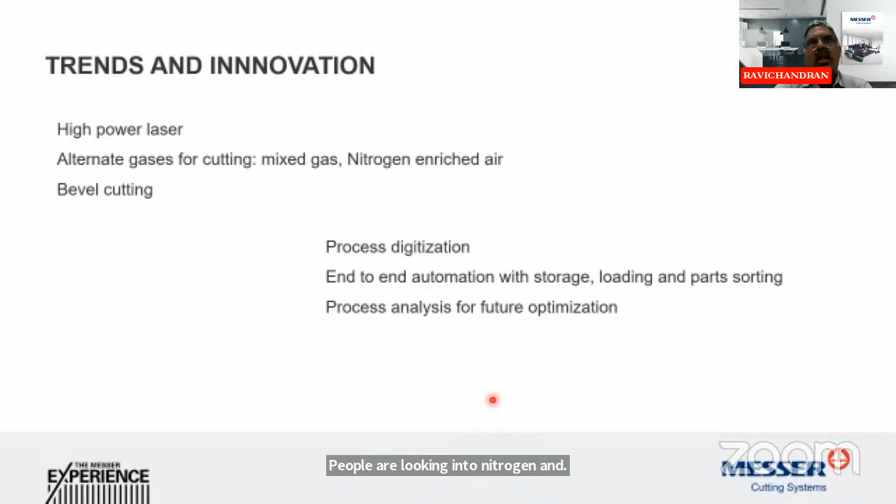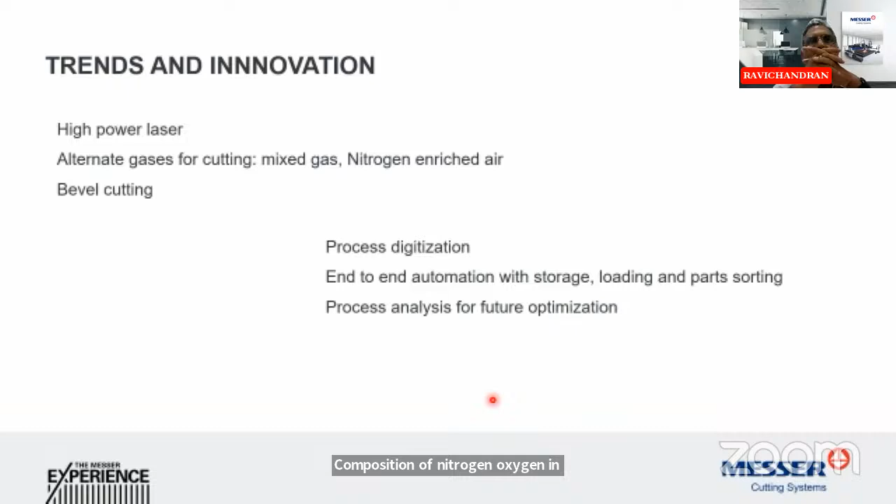What you can say is control the composition of nitrogen and oxygen in a given volume of gas, so that your gas utilization is reduced and your cutting quality increases. And then bevel cutting, which was not a big thing in laser earlier, has now come into existence. People have started doing more laser beveling, so that the cutting surfaces are much better than plasma cutting, with less taper than what you get on plasma cutting.

So these are all the trends in laser cutting. Regarding automation, process digitization, it's not a single machine but end-to-end automation with material storage, retrieving, loading, and part sorting put into one. Nowadays, we are seeing shop floors which used to have at least 20 to 30 people working, reduced to 2 or 3 people, with fully automated material movement, even using AGVs for shifting cut parts from one line to the other. Such is the transition happening in automation.

And with all these things, process analysis for future optimization. The real-time feedback of the machines gives an opportunity to analyze the process and optimize to reduce bottlenecks. So these are the trends. Everything is done for increasing productivity, reducing wastage in terms of process time, manpower, material, and equipment usage. So these are the latest trends in laser cutting and automation.